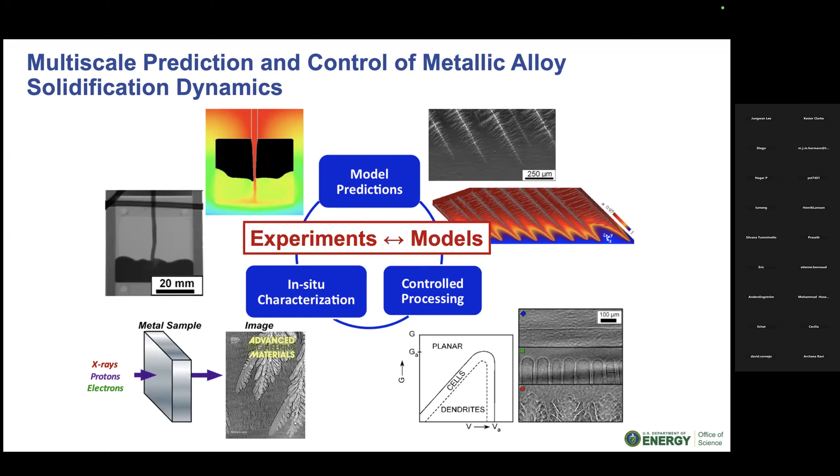Length scale is important in our work, but also time scale, which becomes important especially when we talk about things like rapid solidification. The aim has always been to integrate the experiments and the models together.

I'm going to start with an example of the type of information we can get from some of these real-time imaging during processing experiments. I'm going to show a movie of synchrotron X-ray imaging of a near eutectic aluminum copper alloy.

Here we're doing controlled directional solidification and melting. For context, this is a 200 micron thick film, which is on the order of the diameter of a human hair, so a very thin film sample. Here we've actually stopped a planar solid-liquid interface in the field of view for the imaging.

In the lower half, you actually see the solidified two-phase eutectic microstructure that appears lamellar in nature. The bright regions are the aluminum-rich phase, and the dark regions correspond more toward the Al2Cu phase. Above, we have the alloy melt.

I'm going to show you a top-down directional melt, and you'll get to see some interesting dynamics that happen. On the melt, you actually see the breakup of the eutectic structure. You see the aluminum-rich phase kind of float off into these matchstick kinds of fragments, and you certainly see things like convection happening in the melt.

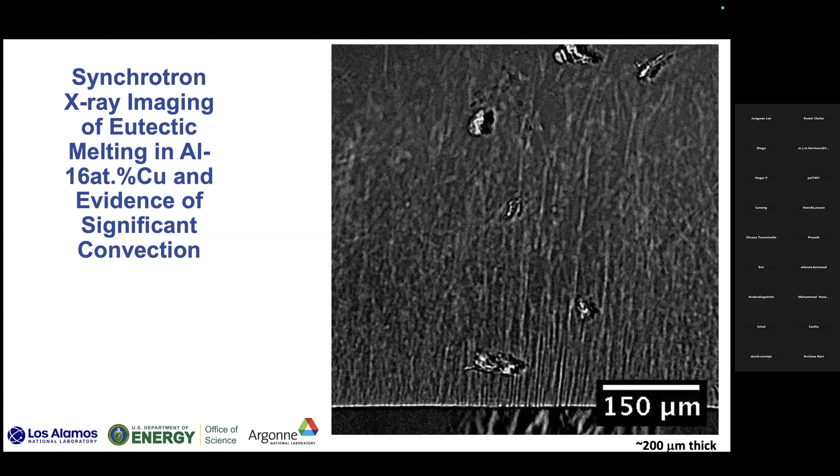Taking that a step further, again being able to see microstructures while we process them, this is an example of what we call an artificially process-derived composite in an aluminum eutectic composition for aluminum copper. What you're seeing here is a solid-liquid interface that we've stopped in the field of view, and we're going to do a series of melt-back and solidification steps.

Up on top here is our solidified eutectic, and then you're going to see a melt back of the interface, again on the order of about 200 microns or so. So here we're melting back the interface.

In the previous example, you saw the eutectic break up into those matchstick bright aluminum-rich fragments. Here you actually see those aluminum-rich fragments spheroidize and coarsen. The aluminum-rich phase is lower density, so it's buoyant and floats at the solid-liquid interface. As we move forward, we trap in that layer and wash, rinse, repeat, creating another layer and forming this artificial composite kind of microstructure.

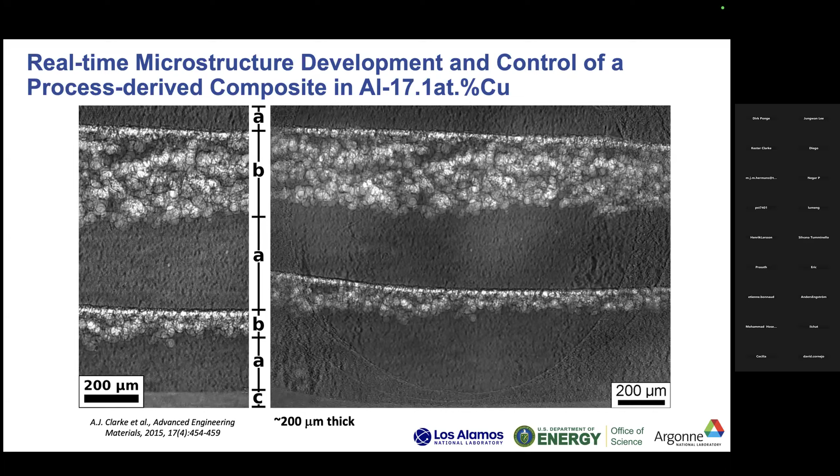So it's pretty amazing the type of control we can have on microstructure development during these in situ experiments. We can see the way things develop and start manipulating microstructures.

Lots of our early work focused on more conventional solidification processes, things like directional solidification and metal casting. If you open a solidification textbook like Kurz and Fisher, you see a nice diagram that provides thermal gradient G and solid-liquid interface velocity V. Those different combinations of G and V impact the interface stability and determine the patterns we develop during solidification.

We can have a planar solid-liquid interface, cells, or these hierarchical dendritic tree-like structures through different G and V combinations. Our early work focused on this diffusion-controlled growth regime, where things like solute and heat transport are very important.

One of the first sets of experiments we did used 200 micron thick foils of a very dilute aluminum copper alloy. We actually mapped out this processing space in real time, the G and V combinations that give us the different growth regimes and the growth regime transitions.

Shown here on one side is an example of the different interfaces we can generate in the solidification patterns—we can have a planar solid-liquid interface, cell-like structures, or hierarchical dendrite structures. On the other side is an example of the GV mapping we did in real time.

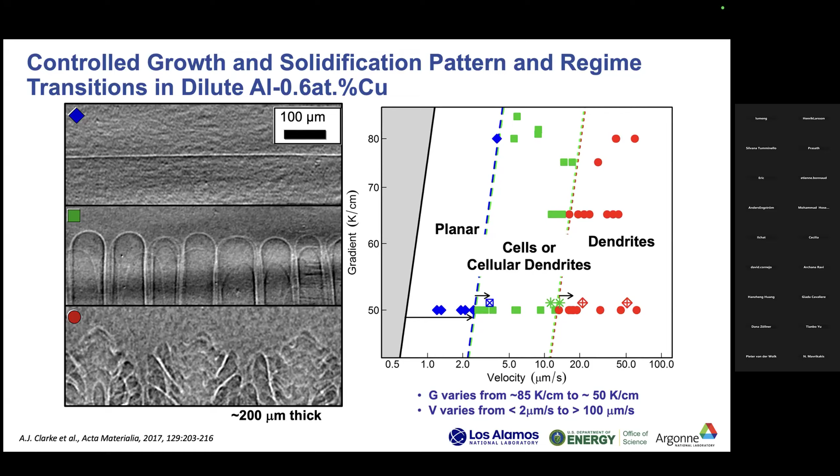So we did a series of very specific top-down directional solidification experiments, and it shows that the velocities at which we see the growth regime transitions shift even higher. The thing we kept coming back to was convection in the melt, and I'm going to show you an example that I hope convinces you of this.

The work I was showing you was on a very dilute aluminum copper alloy, which doesn't have great contrast in the synchrotron X-ray imaging. But I'll show you an example for tin-bismuth, which shows it much more clearly to illustrate the point. This is a false-colored synchrotron X-ray movie with top-down directional solidification.

You'll see tin-rich dendrites sweep into the field of view, colored red, and then you'll see the bismuth solute, colored blue, falling in plumes in the melt—showing the enhanced effect of gravity here.

The bismuth solute is higher density, so we're taking advantage of the enhanced effect of gravity here. An important point about this example is that this is an even thinner sample—thinner than 200 microns. We see that even in these thin, constrained samples, we still see convection in the melt.

Why is this important? If I took this to one of my colleagues, like Alain Karma at Northeastern University, and asked him to do modeling of the microstructure, in the first pass they likely wouldn't incorporate the convection in the melt. That's sort of what you see here.

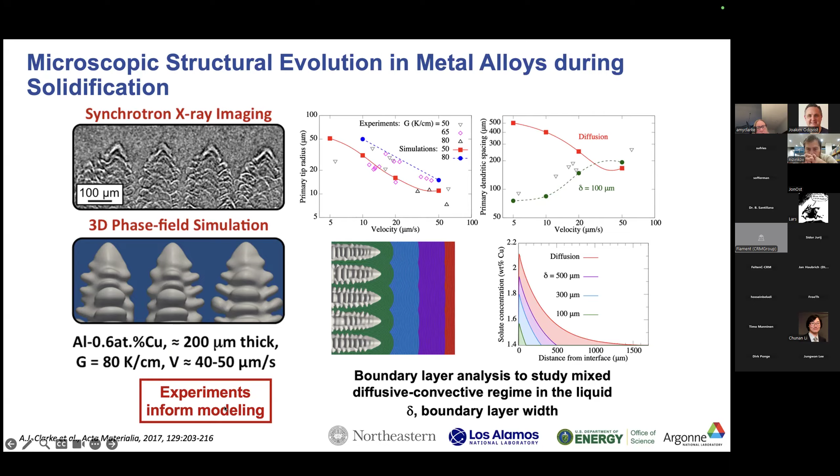So if we think about solidification, we end up building up a solute boundary layer during directional solidification, and we know that we have convection in the melt that impacts that. So what we did is we actually truncated the solute boundary layer, and when we do that down to about 100 microns or so, now we have good matching with the experiments. I like to show this example because it shows that these in situ experiments are telling us what physics is missing from the modeling so that we can be predictive about microstructure development.

On the other end of things, metal casting. As I mentioned, we have done some of these kinds of experiments. This is an example of 800 MeV proton radiography, or PRAD, done at Los Alamos National Laboratory. This has benefits such that we can look at a much larger field of view, and we can also look at high density metals and alloys that would be more difficult with synchrotron X-rays.

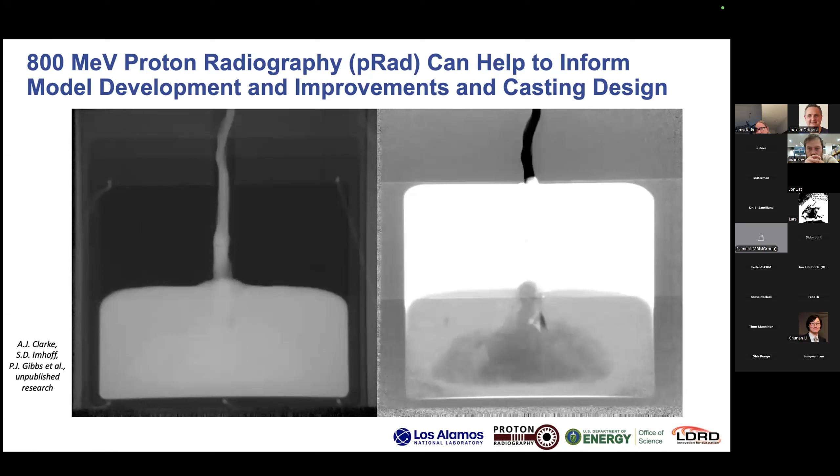In this example, I'm going to show an alloy melt, eutectic tin bismuth, that's halfway up the crucible, and then we're dropping in molten bismuth liquid. You can see the actual fluid flow patterns that develop in the melt. It's pretty cool that we can see that, and seeing that type of flow behavior can be important for things like computational fluid dynamics and really understanding and doing casting design.

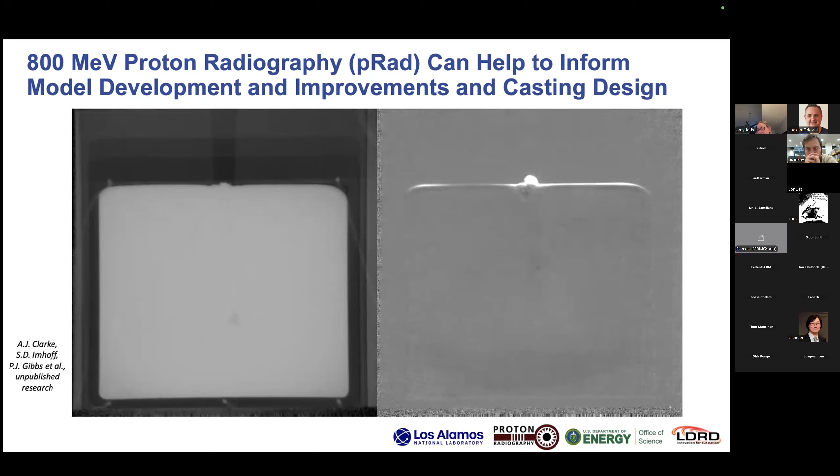One of the things always of interest to us, when we're doing the modeling, is are we getting that right? This is an example of work done by my student Nadira Surghani, where she's taken this PRAD movie and done some Flow 3D cast modeling using different assumptions about the metal mold heat transfer coefficients to match with the experiments. In this case, Model 2 ended up better matching the fluid flow we see in the experiments.

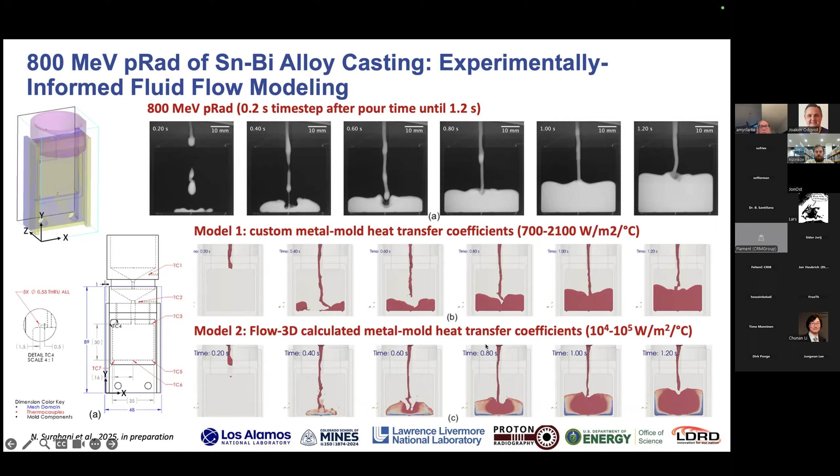As I mentioned, we load this up with thermocouples. This is an example of this zoomed in region of the thermocouple traces directly compared to the modeling results for these different metal mold heat transfer coefficients. What was kind of interesting is that Model 1 actually did a better job matching, but as I mentioned, Model 2 did a much better job with the fluid flow. So Nadira ended up going with Model 2 in this case.

We also know from the microstructure, we can look at characteristics like primary or secondary dendrite arm spacing, and relate that to cooling rate. This is an example micrograph of the top of the casting, which is much coarser than the bottom of the casting, which has a much finer dendritic structure. Here she's doing comparisons in terms of secondary dendrite arm spacing. Again, this has a lot of potential impact to better understand metal casting and casting design.

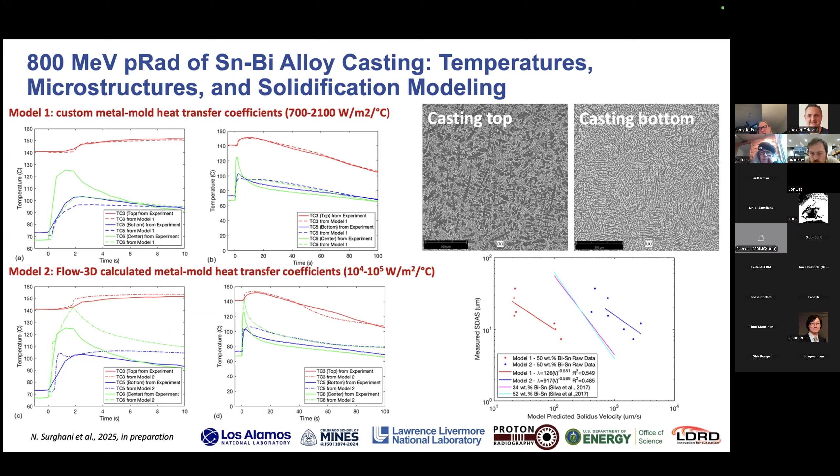And we have done some PRAD experiments looking at microstructure development as well.

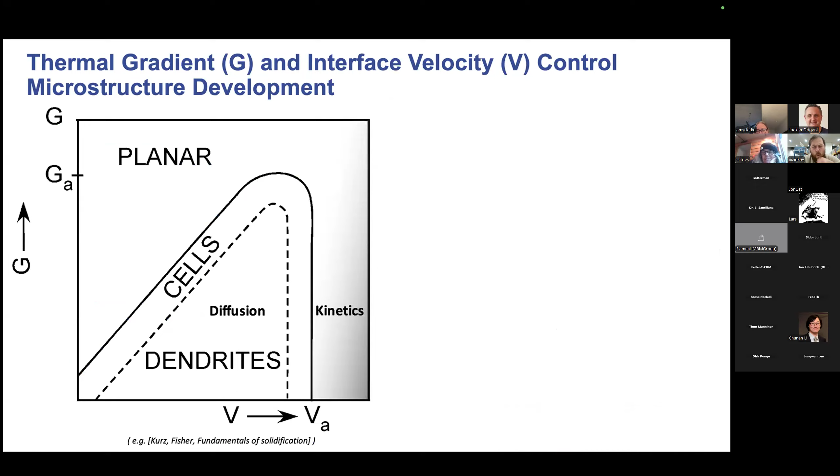Another area that's always been of interest for us is going beyond these conventional solidification processes to things like rapid solidification that you might encounter with, say, additive manufacturing. Again, this is our GV map, and we really focused on this diffusion controlled growth regime in early work. Then the question is, what if we go to higher solidification velocities, and what types of experiments and modeling can we do to better understand that?

Basically the way it works is you sputter deposit a 100 nanometer thick film on an amorphous silicon nitride substrate. You can then hit this with a laser and create a molten metal pool, and then you can watch solidification dynamics at very high spatial and temporal resolutions, much higher than you could do, for example, with synchrotron X-rays.

One of the neat things about this is that because you have a thin film sample geometry, you mitigate things like convection in the melt. This makes it really nice to compare with solidification theory.

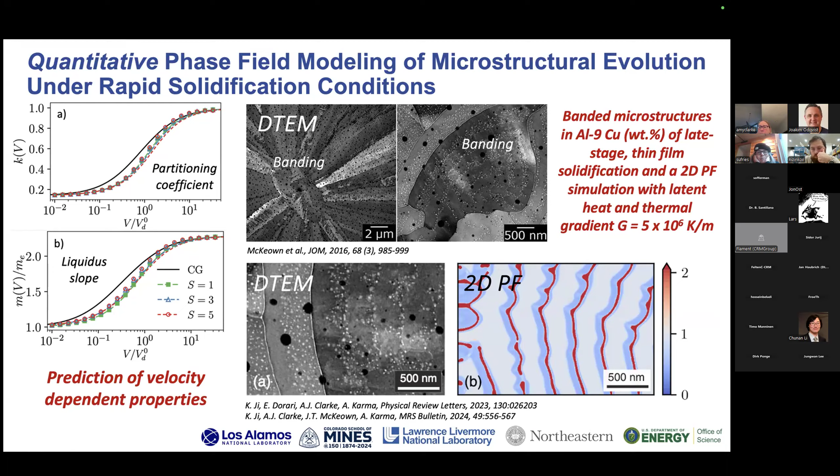One of the important things about this model is that it includes latent heat in this particular model. These are some nice simulation results. Hopefully these movies play from my colleague Alain Karma's group.

This just shows two example simulations, one without latent heat and one with latent heat. Basically the impact of that is on the length scale of the bands that we develop. So without latent heat, we form a much coarser microstructure as compared to including it. So it highlights that that's important in terms of actually getting those quantitative predictions with our experimental data.

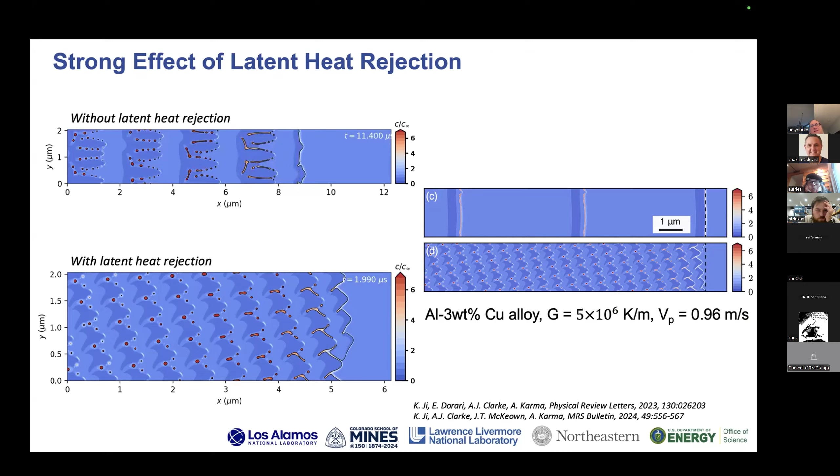So this is an area we're going down right now, again, looking at things like grain competition, looking at things like dendrite orientation transitions, tied to the anisotropic effects, for example, and also even looking at pattern selection and concentrated alloys relative to absolute stability as another area we're working in.

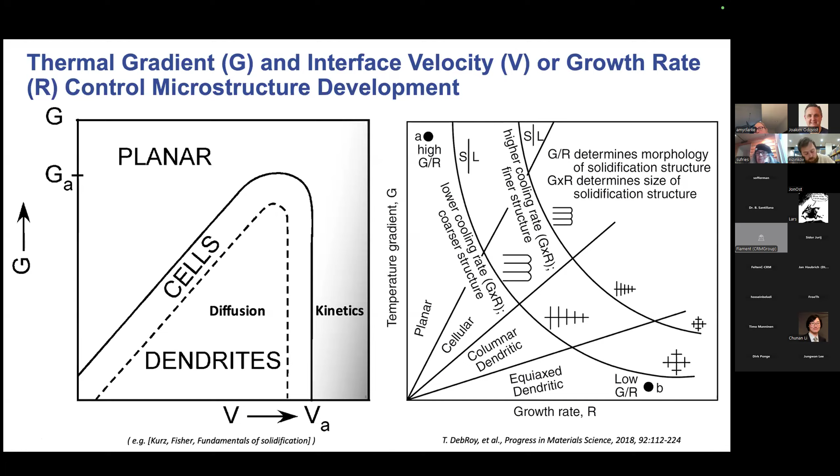This is where we go from elongated columnar-like grains that might have anisotropic properties to more equiaxed, refined grains that you'd expect to have more isotropic properties. The CET is especially important in the context of additive manufacturing. In addition, while G over R, or G over V, determines the morphology of the structure, G times R determines the length scale of the microstructure—fine or coarse—which can impact things like fatigue performance of materials.

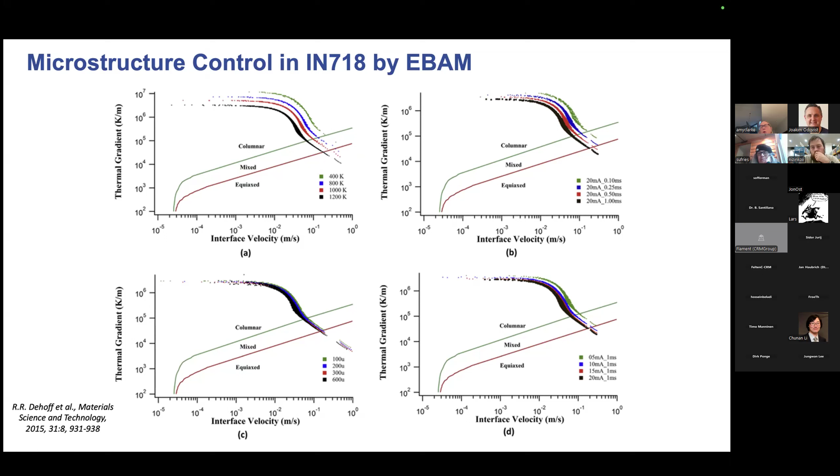With that in mind, this is really nice work that came out of Ryan DeHoff and coworkers at Oak Ridge National Laboratory: microstructure control in Inconel 718 by electron beam additive manufacturing. Here you're looking at gradient versus velocity and the columnar to equiaxed transition, CET. You're looking at the G-V conditions experienced relative to the CET, which has a big impact on microstructure development and allows control over microstructure during processing. In this example, they crystallographically spelled out 'Department of Energy,' or DOE, in the microstructure by turning the columnar to equiaxed transition on and off during processing—pretty cool.

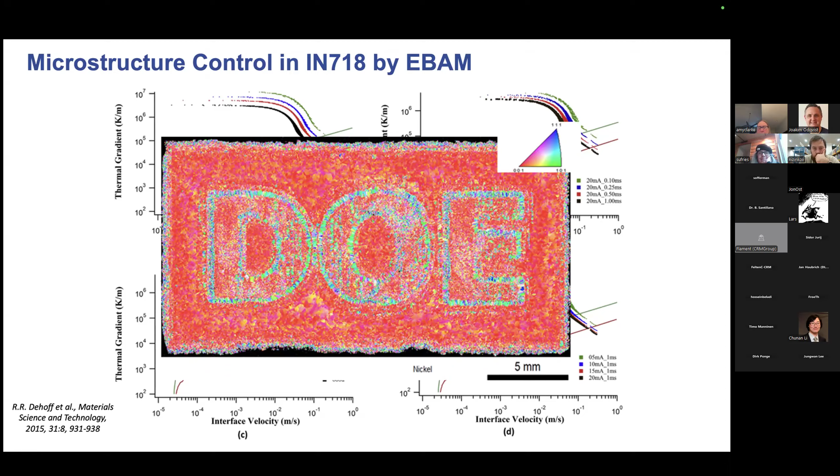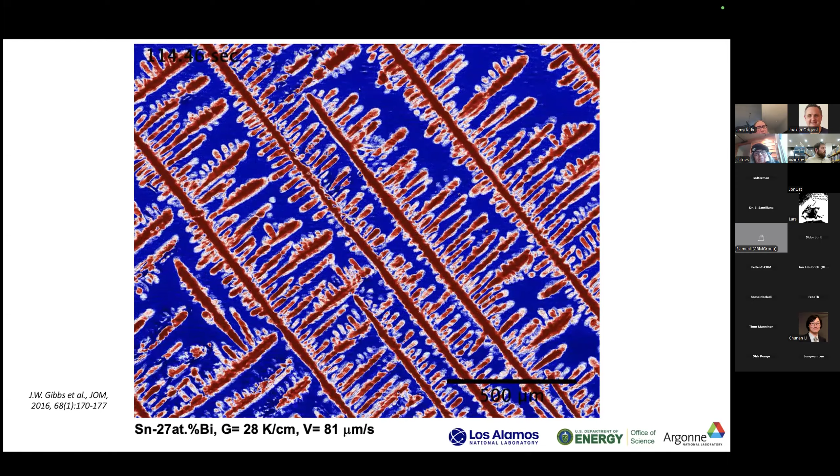I previously showed you top-down directional solidification for tin-bismuth. Now I'll show you the bottom-up version. In this case you see the dendrites growing bottom up, colored red, and then the blue bismuth solute settling—it's higher density. You can also see fragmentation of these tin-rich dendrite arms off into the melt, since they're more buoyant and want to float. Those kinds of events can actually trigger columnar to equiaxed transition within a casting, so it's also important to metal casting.

The extreme end of rapid solidification that we look at with DTEM involves velocities on the order of 1 to 2 meters per second. For additive manufacturing, we actually have to dial this back a bit—usually we're looking at velocities of a meter per second or less, really tenths of a meter per second. This is some work we've done trying to better understand additive manufacturing.

This is in collaboration with Tresa Pollock's group at UCSB. Tresa provided us some nickel-moly-aluminum single crystal samples, given to us as pigtail single crystal castings. The neat thing was we could then strategically cut out specific orientations to look at and do really clean studies.

Now we're doing synchrotron X-ray imaging of these single crystals under different power conditions, doing simulated additive manufacturing. An X-ray beam comes in at the location of your sample, which can be a thin film, a film with powder on top, or a packed powder layer. The laser beam comes in, impinges on the sample, creating a molten metal pool—a spot melt or a raster—and you can optimize for imaging or diffraction.

This is a nice example of one of these spot melts on a single crystal, and you can see the sloshing liquid in the melt pool. We can also track the solid-liquid interface velocity, looking at velocity versus position from the edge of the melt pool for different power conditions. Some trends fall out: for higher power conditions, we tend to see lower velocities in general, whereas with lower power we tend to see higher velocities. We also tend to see higher velocities towards the tops of the melt pool.

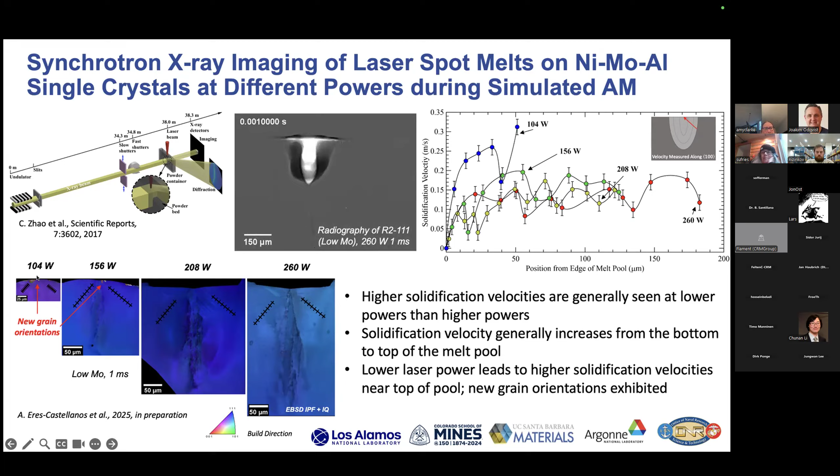And then for the lower power conditions, you see some new grain orientations at the tops of the melt pools where the higher velocities are experienced. This kind of summarizes some of those results.

So a couple different compositions, a bunch of different orientations, different power conditions. I've already sort of talked about velocity versus power, but again, we can look at characteristics of the microstructure.

So this is now primary dendrite arm spacing versus power. One thing that falls out of this that is really illustrated nicely for this higher moly alloy is we can see at the bottoms of the melt pools, we tend to see much more refined microstructures as compared to the tops of the melt pool, which is sort of interesting.

And so why is this? When we go to higher powers, we tend to have more chaotic melt pools and often have keyholing and keyhole collapse that happens. So this is an example of a high power condition where we have a keyhole collapse, where we have a spike in velocity, and then it's sort of business as usual for the rest of the melt pool solidification.

And if we go in and look locally at that keyhole collapse region, we actually see some new grain orientations. So we have a velocity that's high enough to trigger columnar to equiax transition and sort of those much finer kinds of microstructures as well. And we tend to see that at higher power conditions, which does make sense.

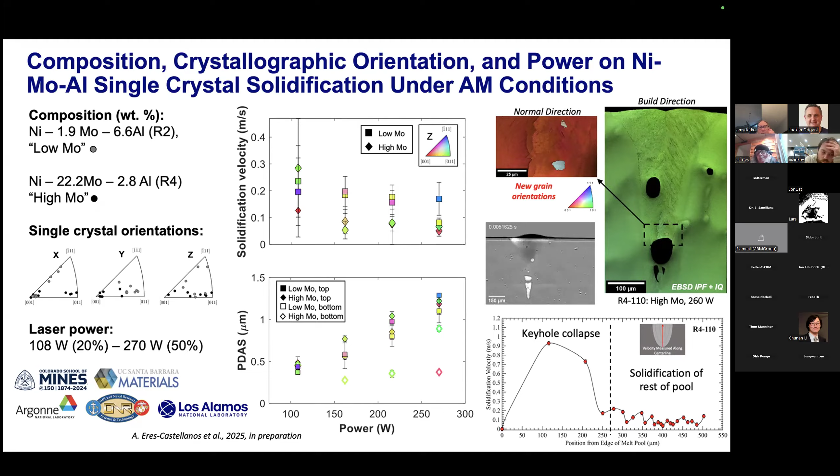So the GV construct allows us to understand microstructure, but also the formation of defects as well. So moving forward to model some of this kind of data, we felt like we really needed a handle on not only the solidification velocities, but also the thermal conditions that are experienced in the melt pool.

So to do that, we started doing Flow 3D AM simulations. Here we're actually doing a set of simulations for one of these spot melts and comparing head to head the velocity versus time of the Flow 3D CFD simulations to our radiography, which match well.

And then we did some nice destructive characterization where we compared Flow 3D radiography, destructive scanning electron microscopy, and also 3D tri-beam, which is a novel technique developed at UCSB that allows us to do 3D characterization of the melt pool. An example data set is shown here for one of our spot melt conditions.

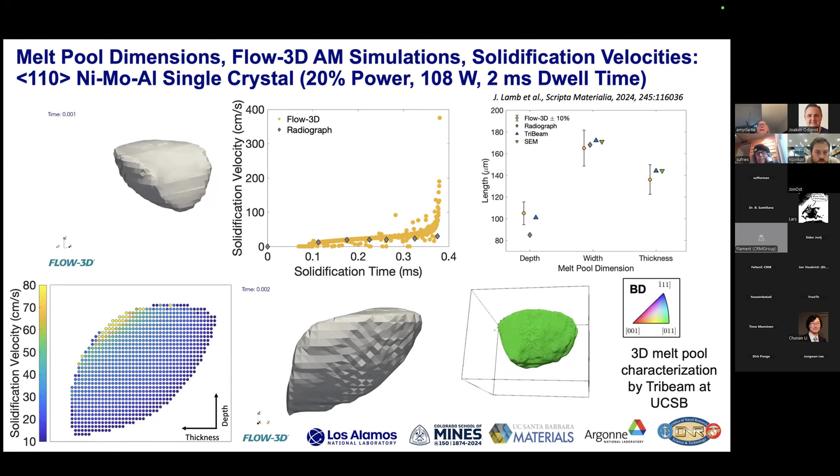And so now that we have the sense that we have fairly good matching across these techniques, we have the velocities sort of bound, we believe them. Now we feel better about the thermal conditions, so we can start moving forward to model microstructure development.

Some of the early work that we did, this is an example of those spot melts, two different orientations for a given power condition. And if we look post-mortem, we see from some of our earlier assessments that we actually see dendritic microstructures, even though solidification theory would predict that we were beyond absolute stability. So we know there's some effects that we need to deal with here in terms of the modeling.

And so now that we have a LANL new phase field model, that's a direction we're going in is better modeling of these nickel moly aluminum ternary samples, including perhaps in 3D.

And I want to mention this is a simulation done with exascale computing by one of my colleagues at Los Alamos National Laboratory of an approximation of this alloy of a nickel aluminum binary composition. So a full 3D melt pool simulation with phase field. Again, better trying to predict for multi-component alloys and also sort of in 3D as well.

And then above is just a nice example from Peter Voorhees' group at Northwestern, where they were doing some of this columnar to equiax transition modeling for us for multi-component alloys and making comparisons with our data. So moving forward now, we hope to start doing some meaningful modeling of these data sets that we have for microstructure prediction.

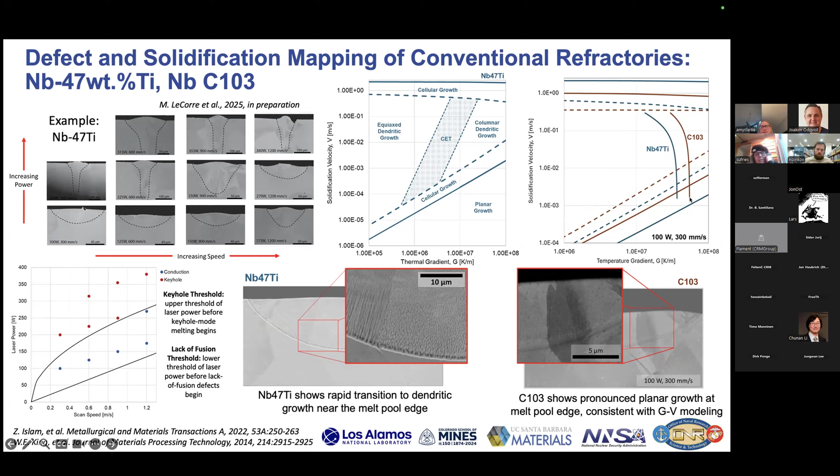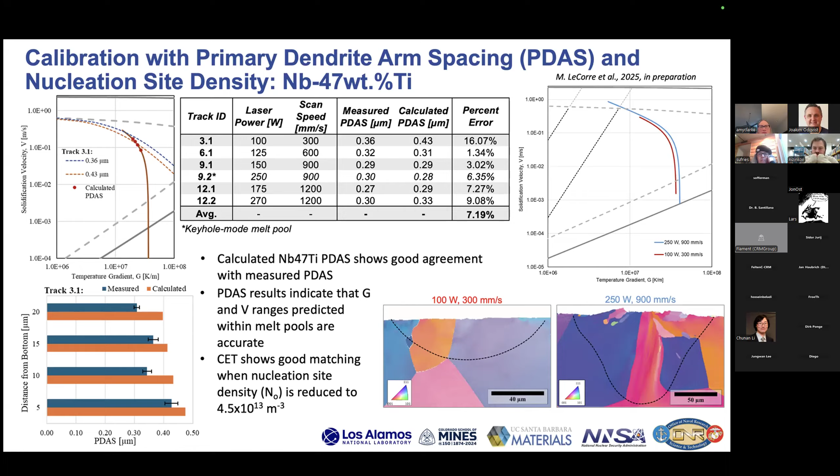This is now making some assumptions about nucleation site density, which is kind of a fudge factor in these approaches. This is bound right now, at least for the moment, with some tri-beam data sets that were generated by Andrew Polonsky, one of Teresa Pollock's former graduate students.

We've now moved on from classic refractory alloys to these refractory multi-principal element alloys, or refractory high entropy alloys, which is a pretty interesting area to think about. Megan is not only continuing these processing optimizations, but also looking at different alloy compositions and trying to predict alloys that could mitigate crack susceptibility.

This is a nice example, alloy D here, that oddly has some tungsten in it, which actually suggests it has good crack susceptibility. She's looking at, in this case in the middle, total undercooling, comparing C103 to niobium Ti and these different alloys. We can see alloy D has a lot of predicted undercooling present.

If we compare the mapping she's done and the G-V traces that are going to be experienced in a melt pool track we've laid down, she would expect to see some refined grains in the melt track. Indeed, she does see refined grains in the melt track. So this is an area that we're moving forward with.

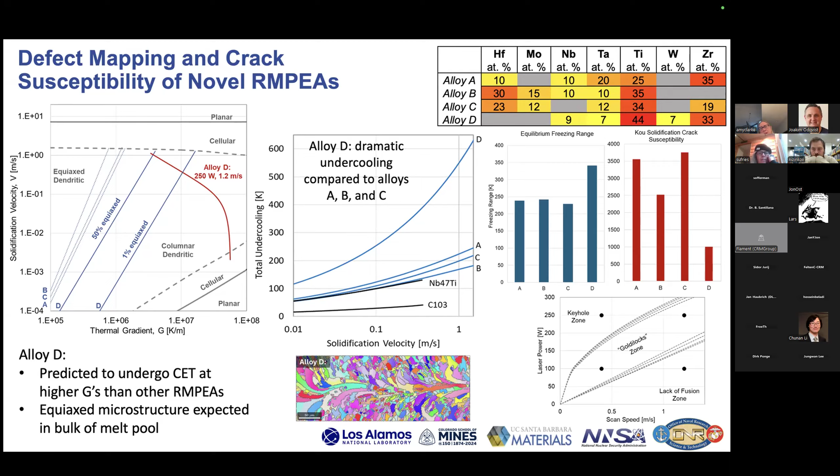These kinds of assessments are obviously much more complicated for multi-component alloys, and this is something we're trying to better understand. Teresa has some students working in this space as well. We do know that when we take all these different high melting point elements and alloy them together, we expect things like microsegregation during solidification.

Why do I think this could be important for things like solidification and additive manufacturing? In related work I'm not going to talk about today, we've done quite a bit on thermomechanical processing of these refractory multi-principal element alloys, and we've shown some neat trends with respect to the segregation patterns that we develop. What's important is that if we have microsegregation from solidification, it's often hard to homogenize this out or get rid of it.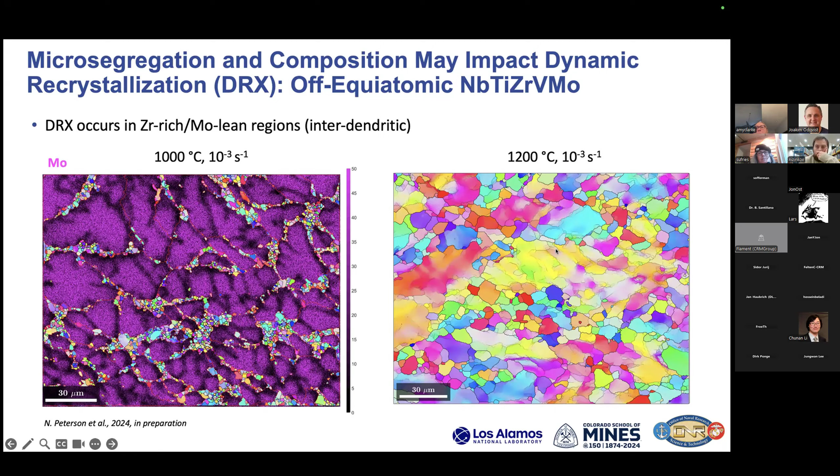That could even be important for things like, say, we build something with additive manufacturing and now we want to heat treat it. There's a lot to think about still in this space about living with the microsegregation we develop during solidification and what that means for downstream processing. In this particular case, we were actually able to recrystallize this alloy.

On the refractory alloy space at the lab, we have an ongoing project right now involving not only Los Alamos but also Livermore and Sandia, looking at refractory additive manufacturing. This has a feedstock angle to it - we know that having feedstocks of refractory alloys, especially novel alloys, is really challenging and quite expensive. So the questions we have surround what happens if we use pre-alloyed powders or wires compared to doing the alloying in situ with DED kinds of processing.

Our work at Los Alamos is really focused more on electron beam additive manufacturing. The neat thing about the capability we have in Sigma is that we have a dual wire feed, so we can have wires of different elements that we do in situ alloying with. That's really our focus, whereas Livermore and Sandia are focused more on powder processing. We really want to understand the processing strategies, the feedstocks, the microstructures, and the properties that come out the other end.

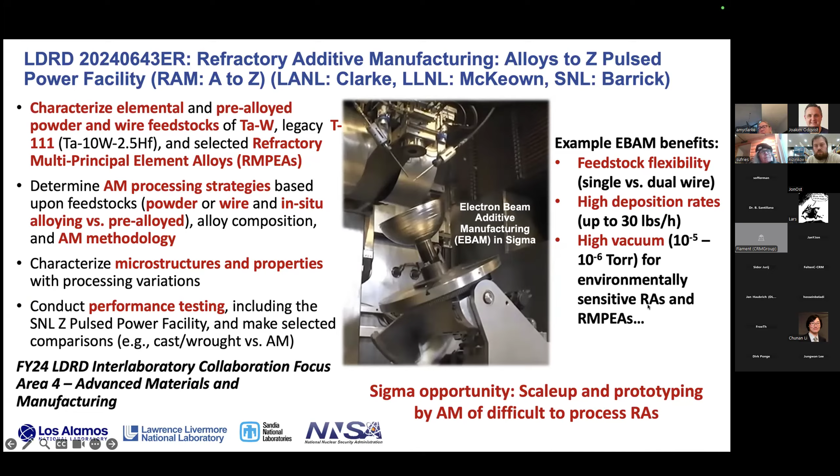Some neat advantages of EBAM, or electron beam additive, are feedstock flexibility and the high deposition rates we can have to make larger parts. The very important one for refractory alloys is high vacuum, especially important for these environmentally sensitive refractory alloys and refractory multi-principal element alloys.

Switching gears a little bit, I'll talk about titanium. We have done some work on Ti-64, which is really a ubiquitous alloy for aerospace kinds of applications. We've done work changing the processing conditions, going from spot melts to a raster, and then the Dehoff pattern, which is something in the middle. Here we actually need to worry about solid state phase transformation as well.

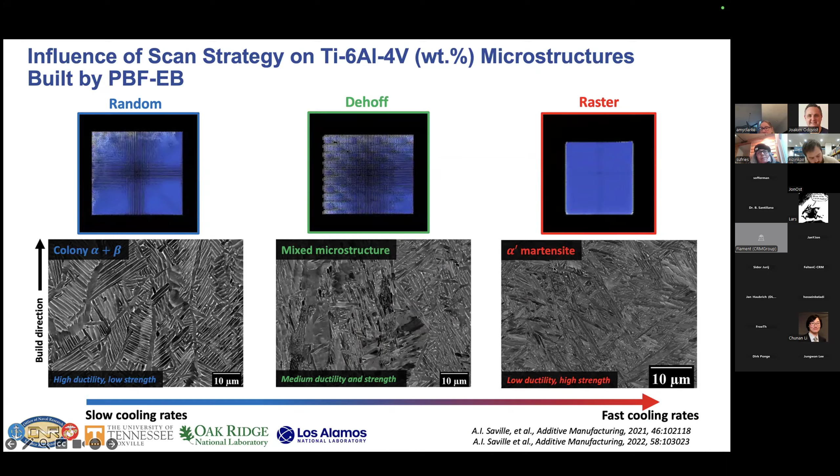We can see that slow cooling rates tend to promote more colony alpha-beta microstructures, where faster rates we tend to get more martensitic kinds of microstructures. Early on in this work, we did some neutron diffraction up the build height, which allowed us to compare and contrast the textures we got for these different processing pathways.

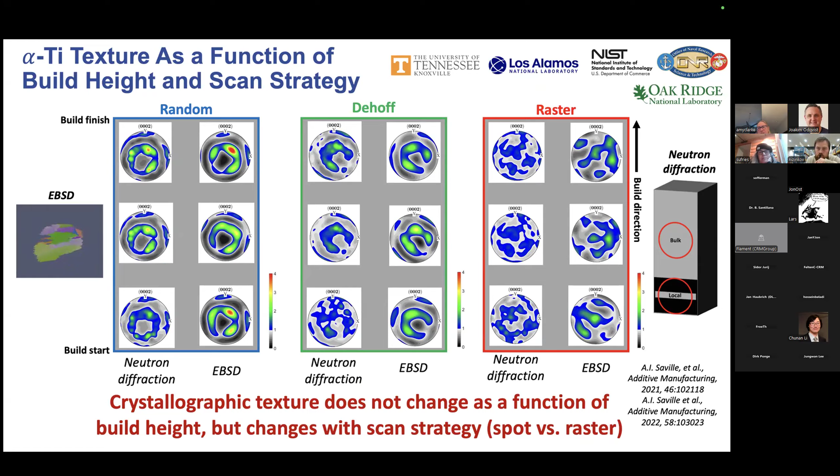We tended to find that as we go up the build height, we don't see big changes in texture, but we do see texture changes when we change from a raster to a spot melt scan strategy, just as an example. We then coupled this with large scale electron backscatter diffraction as well.

Here I'm showing the two bounding conditions, the random spot melt and the raster scan strategy. We know that in Ti-64, we can use the orientation relationship to go from the product phase back up into the parent phase. So that's what we're doing here, back-calculating the parent phase orientation for the random and raster conditions.

We can see for the random condition we have a much more refined microstructure, whereas for the raster we have a much more columnar-like microstructure. If we look at that in terms of GV, we see the blue points here correspond to random.

We have a broader sweep of GV that correlates with our more mixed microstructure, as compared to the raster, where more red tends to be more columnar. So this all makes sense.

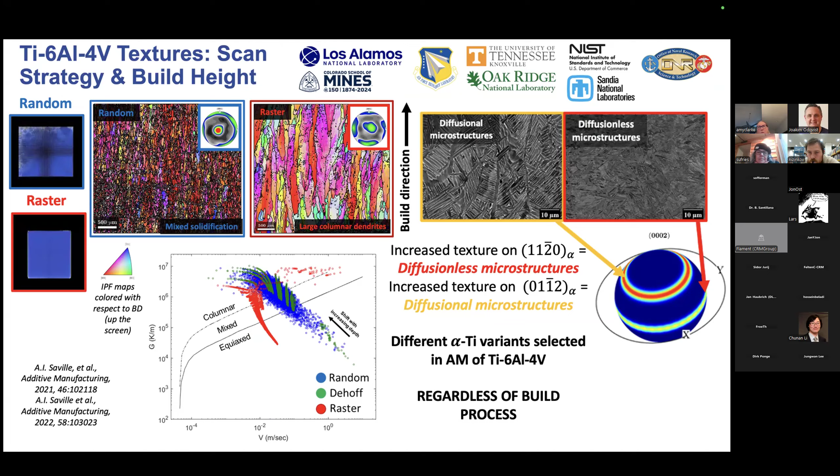My student Alec did a lot of work looking at the textures developed in the as-built condition, and these diffusional and diffusionless kinds of microstructures. He showed that different texture components tell you a lot about what type of microstructure you've generated. This is important because it means you can do a build, assess the texture, and have a good idea all the way back to the high temperature condition of what the microstructure was like during solidification. We feel this is a nice pathway to qualifying and certifying Ti-64 and understanding the processing conditions that are imparted.

In addition to Ti-64, we've explored some metastable beta alloys as well. The nice thing is you can retain the beta phase at room temperature, and with deformation you can promote deformation-induced phase transformation. This is like advanced high-strength steels, for example, where you have austenite, and with deformation you undergo transformation-induced plasticity, or TRIP, to martensite.

This is some work we did using ultra-fast diffraction at the Advanced Photon Source on tiny tensile bars, pulling them apart at 1,000 per second with a Kolsky bar. What's neat is we can monitor the phase transformation. Here in blue, we're monitoring the reduction of the beta phase and the increase of the martensite that forms with deformation as we're ripping these samples apart. This was in Ti-1023.

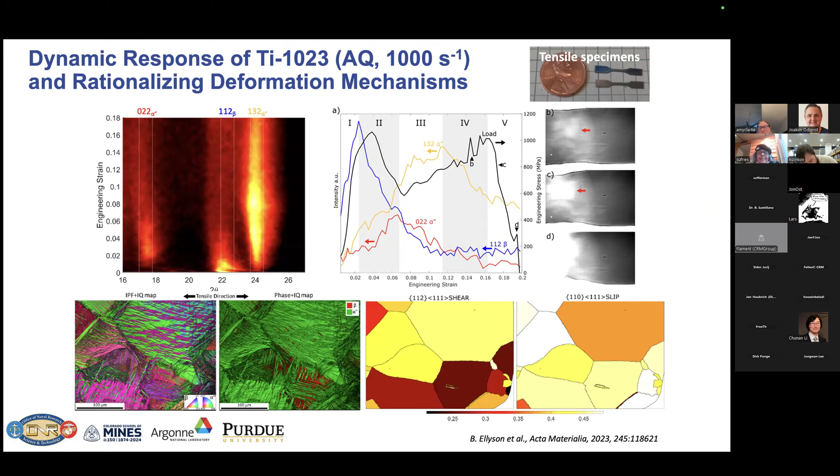In this Ti-1023 alloy, we also did some laser track melt studies. This is an example of one of these track melts. We have this massive heat affected zone underneath where we see a lot of martensite product present, which is actually pretty interesting.

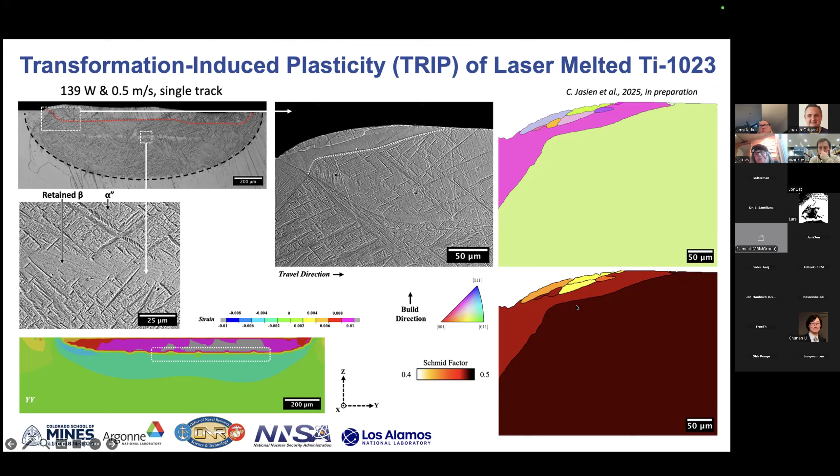One of my students, Chris, did quite a bit of work trying to understand the propensity for this deformation-induced martensite in these metastable beta Ti alloys. This is an example of a track melt and a subsurface region where we had retained beta phase. He did a lot of modeling to understand those local conditions and why we do or don't get phase transformation. Coupled with that, he was also looking at grain size effects and orientation effects in terms of the propensity for transformation in the beta alloys.

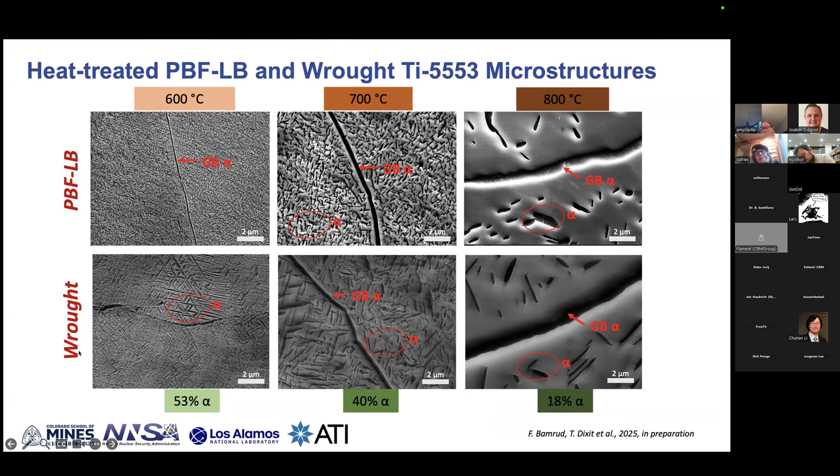More recently, we've done some work on the alloy Ti-5553. In this case, we heat treated the microstructures to have different extents of alpha phase, comparing powder bed fusion, laser beam to wrought material. We're more interested in the dynamic material properties we get out the other end, with and without heat treatment.

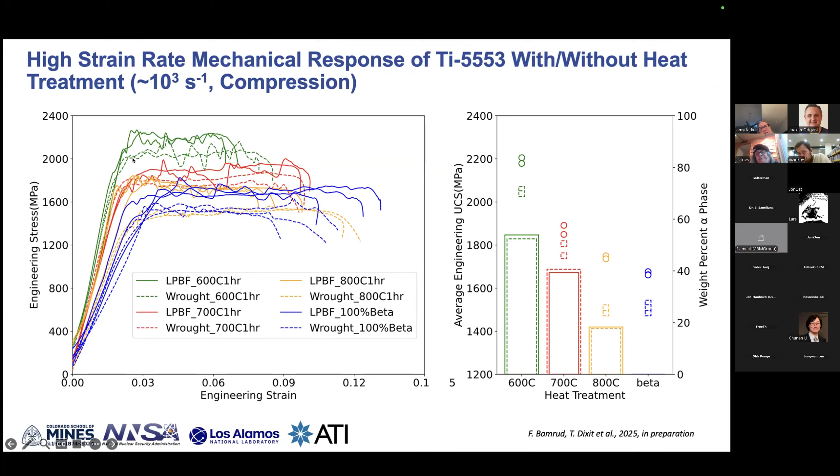In summary, as we increase the alpha phase amount, we obviously have higher strengths. Comparing head to head the powder bed fusion to the wrought condition, powder bed fusion tends to outperform the wrought material in all the conditions we explored. Looking at the post-deformed samples of powder bed fusion versus wrought, in the beta condition compared to the heat treated condition, as we increase the amount of alpha phase we tend to see decreasing localized deformation.

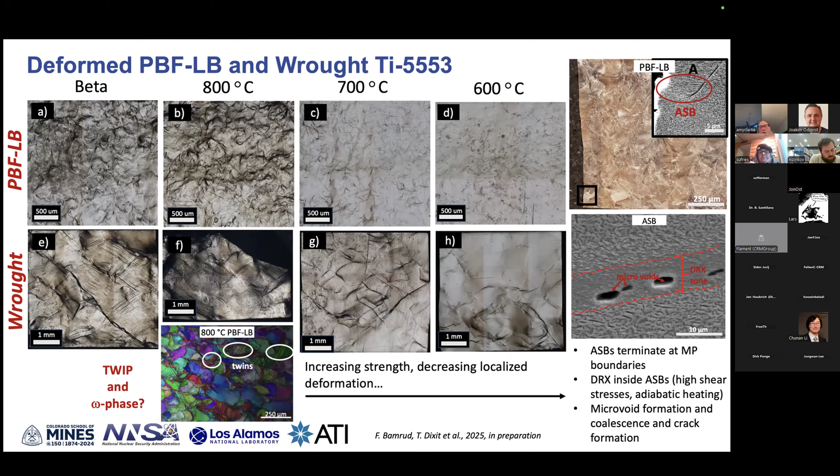For these beta alloys, we're also interested in other aspects of the microstructure, such as twinning-induced plasticity. We do see evidence of twinning. And there's always the question about omega phase in beta alloys, whether it's athermal or deformation induced.

What's neat about TiCu (titanium copper) is that you actually form a eutectoid product in the solid state as well, much like pearlite in steels. However, this eutectoid product in Ti-Cu is at the nanoscale—much, much finer, which is pretty interesting.

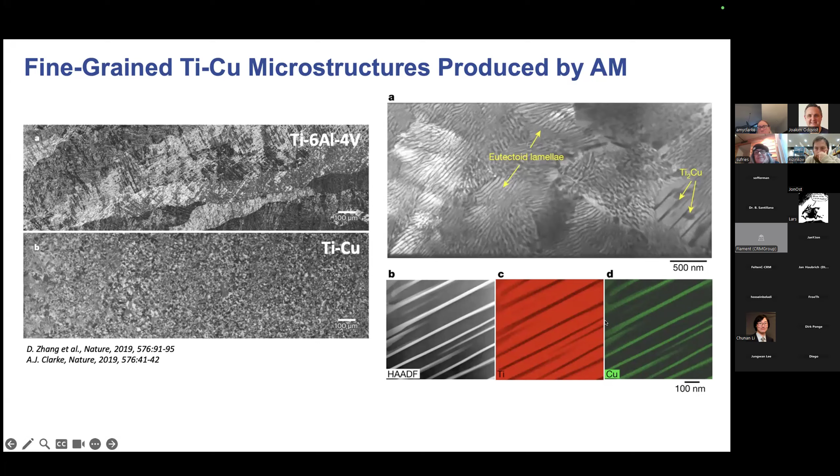One of the things we postulated is that in addition to solidification, you might also get grain refinement in the solid state by thermal cycling during additive manufacturing. So one could imagine whether you produce equiaxed or columnar grains during solidification, then if you go through the solid state transformation with a fast cooling rate, you make martensite; with a slow cooling rate, you make eutectoid, again much like pearlite in steels.

Then what happens as you thermally cycle relative to the eutectoid transformation temperature? We did some controlled dilatometric heat treatments cycling relative to that temperature, and we showed that we were able to refine and reset the microstructure, creating refined grains just from solid state thermal cycling. What's neat is it gives you another pathway, in addition to solidification, to refine the microstructure.

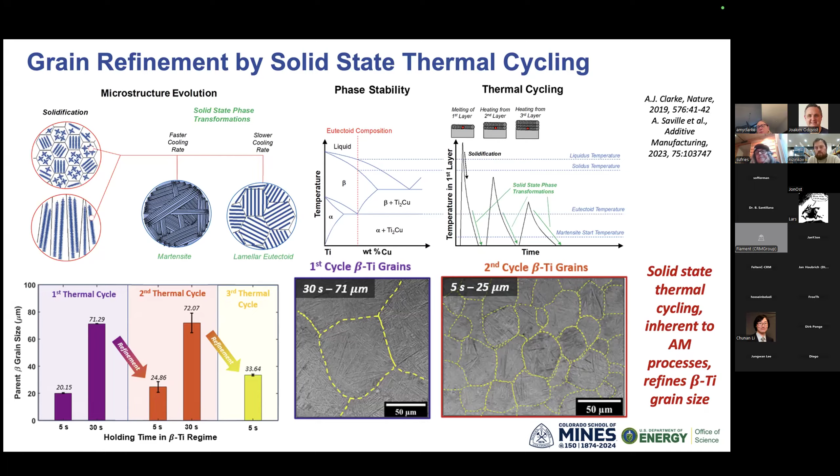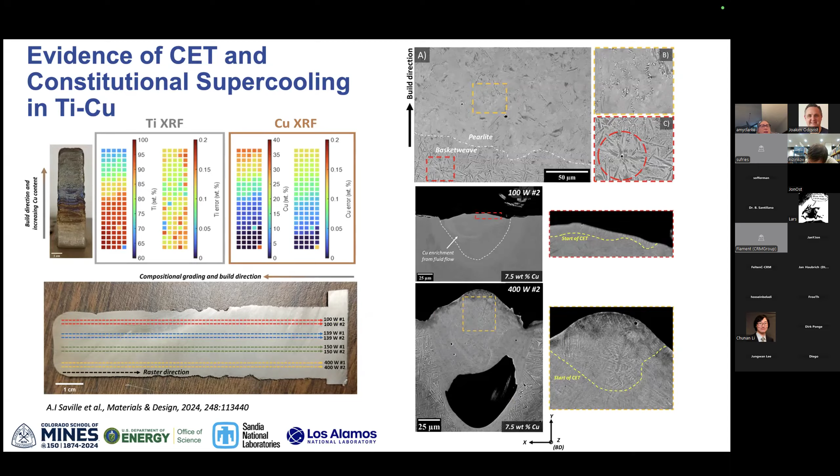We did some work after that where we did DED builds in collaboration with Sandia National Lab, compositionally grading up the build height. We then laid laser track melts in that and looked at the microstructure. We tend to see around the eutectoid composition that we actually have CET. We believe both of these things are happening, and it's more prominent at the eutectoid composition—but this is a unique system, maybe suited especially for additive manufacturing.

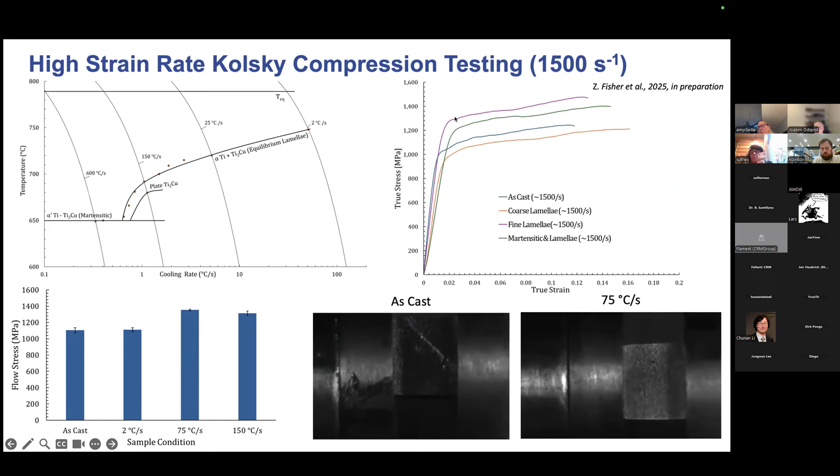More recently, we've been getting into the properties of these nanoscale lamellar microstructures. This is a CCT diagram developed by one of my students, Zane, where we've done some Kolsky high rate compression of these ultrafine scale microstructures. We tend to see the fine lamellar condition performs much, much better than, say, the coarse lamellar condition, just as an example.

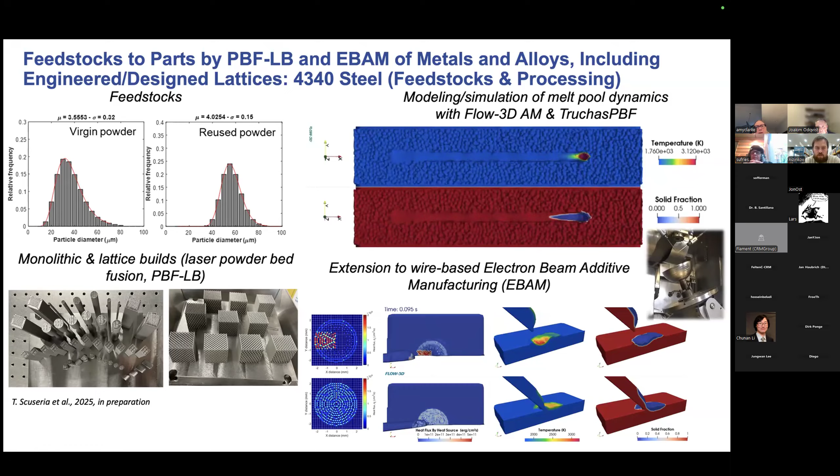Adapting that kind of modeling to EBAM scenarios and wire-based scenarios is another thing we're doing at the moment, taking that from feedstocks to parts, especially for designed and engineered lattice structures. This is an example of mechanical properties and performance, both with and without heat treatment, and here we're comparing round specimens versus flat specimens—it's interesting that you do see a difference.

High rate mechanical testing, looking at the microstructures we develop with processing and really understanding those processing conditions. We see some unique things in steels resulting in maybe more bainitic or martensitic microstructures that we're trying to deconvolute at the moment. Then understanding from the topology point of view what we actually design to build versus what we actually build, with computed tomography, and then forward modeling the properties and performance for these lattice structures.

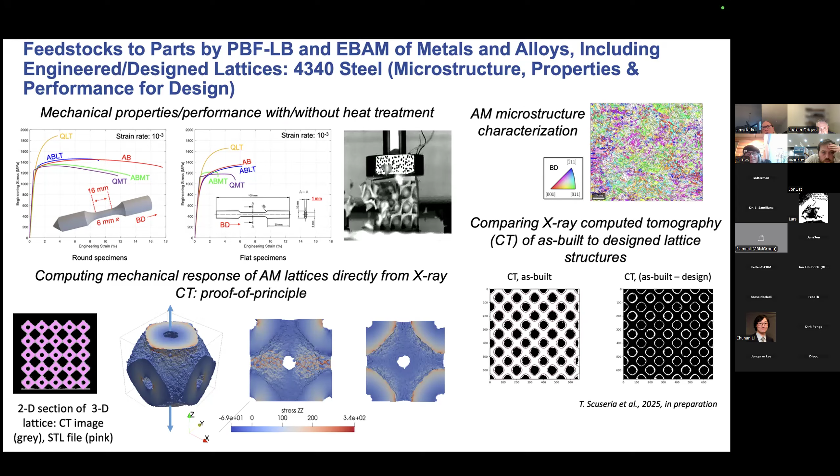So in conclusion, state-of-the-art in situ characterization really allows us to understand solidification dynamics, including with additive manufacturing. We've shown quantitative phase field modeling can predict the banding and growth competition. The G's and V's are really important, and when we combine that with the characterization and theory, it really allows us to move forward with predicting and controlling the way microstructures develop.

Crystallographic information, including in 3D, can give us important insights, and this is a direction we're moving more into. A lot of opportunity exists for metastable phases, solid state transformations, etc., to really match that to the AM processing signatures we have, and also to exploit heat treatments and solid state types of transformations. The unique microstructure and defect characteristics may produce interesting mechanical properties, and this is an area we're getting more into.